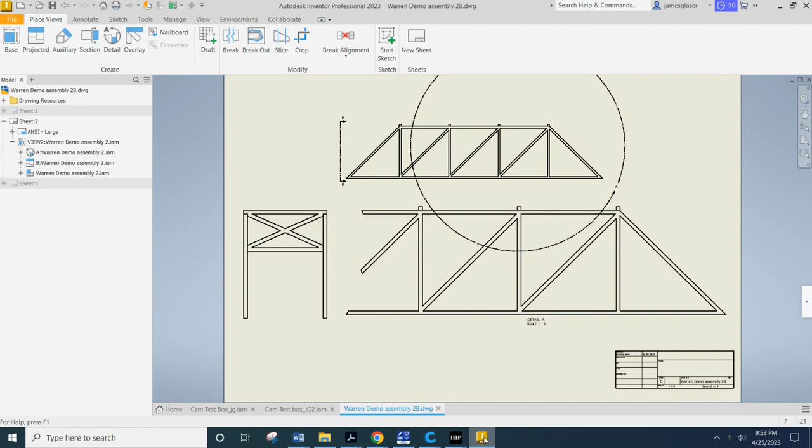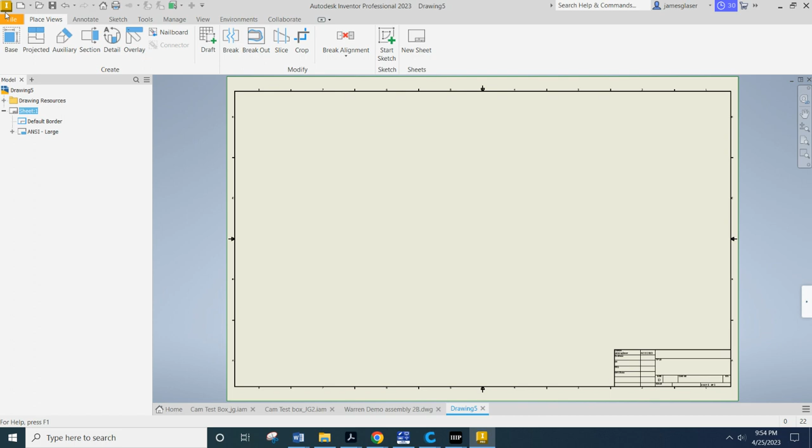I'm going to go ahead and start out with a new drawing. So just new drawing, and it pops up like this. We want to double check to make sure that we are in that ANSI large by looking at edit sheet and seeing that we are a size D with the 22 by 34 inch scope. And now we want to place our first view.

Keeps popping up with that for some reason. I don't get it. Whatever.

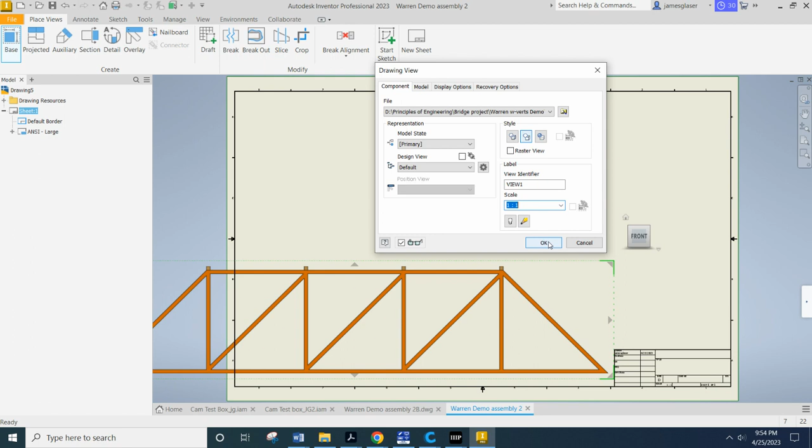Warren 2, that's what I'm playing with right now. As you can see, it popped up really small. Our goal here is to get a 1-to-1 ratio so that way it's much easier for you to make your pieces and also form your whole bridge. So I'm going to go ahead and put that to 1-to-1 and then click OK. And now drag my bridge around.

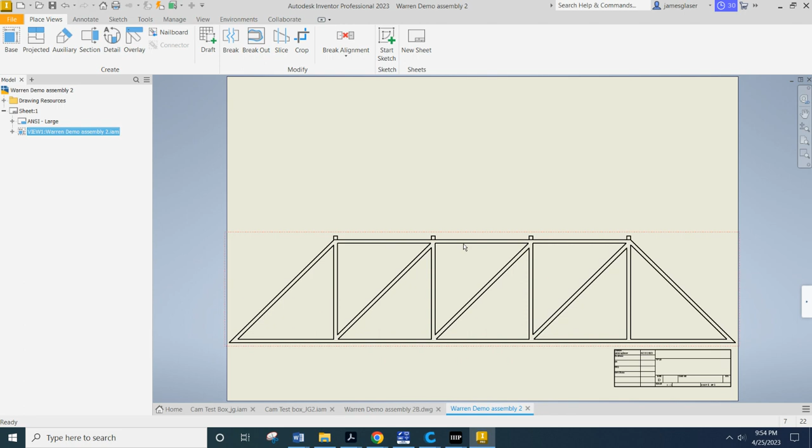Now, what you see here is how it seems a little bit long. So what I'm going to go ahead and do, I'm going to delete the border in order to give me some more space that's clear. But this thing barely fits on there. I'm going to show you a couple of options of how to actually get this to fit on there a little bit better. But before I do that, I'm going to show you, if you're happy with how this is, you can go ahead and just do a projected view and drag it on out here.

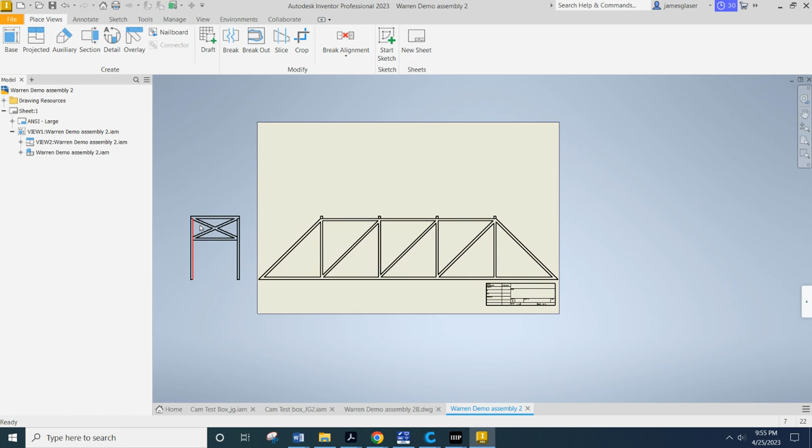I clicked left click one time to set that little green box that you see. Now I'm going to right click and click create. Now you see that this is off the side here. What you need to do in order to drag this up to this empty space is you need to hover over this thing so you see the red box pop up. Right click it and say edit view. Then you're going to come over here to display options and you want to uncheck this align to base.

Normally when you have a projected view, you have it aligned with the base. We don't want that here. So I want to drag this thing up here. And now I've got both of those views that I can use to make my truss pieces on one sheet.

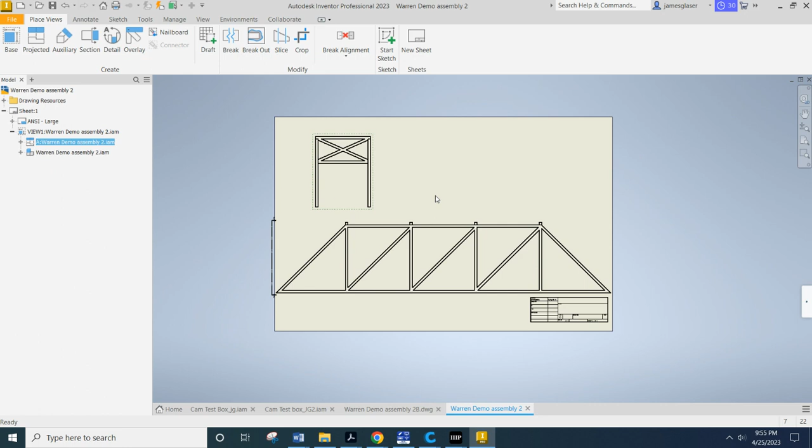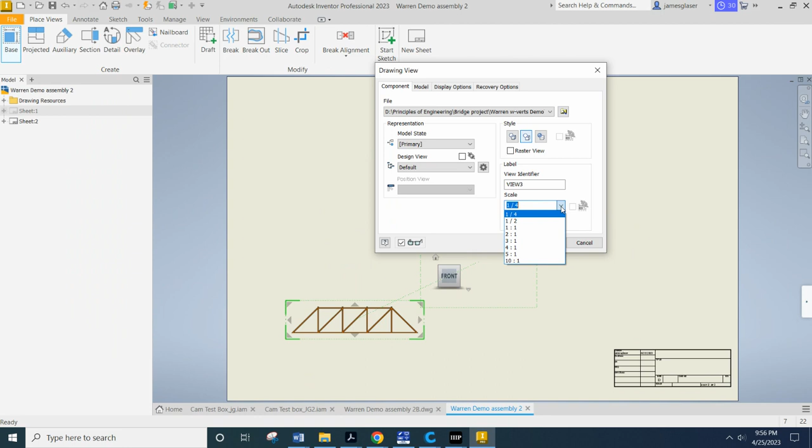But let's say for a minute that you have a truss that is just hanging off both ends. Well, I'm going to show you how to deal with that, or just in general what some more options are. First off, I'm clicking new sheet, and it's going to copy the same properties of the old sheet to the new sheet. I'm going to drop a base view of my truss. Open. And for this case, I'm just going to do a 1-to-4 ratio because I'm going to imagine that it's way too big to drop on here. It's just going to be hanging off the edges. But I still want at least a section of this thing that is going to be 1-to-1.

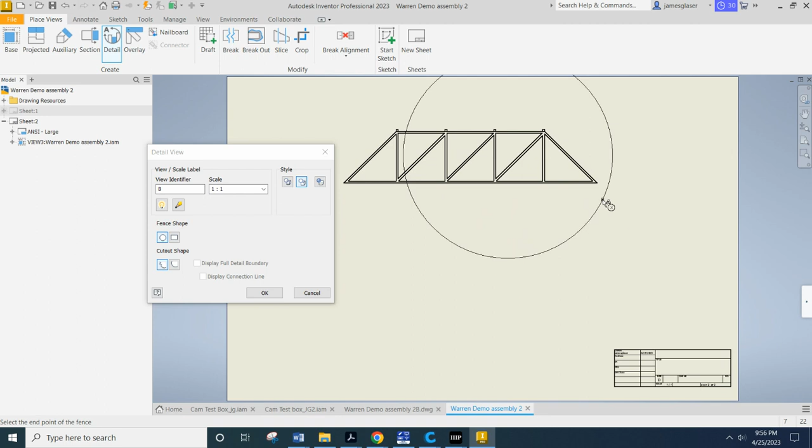So I'm going to click this detail view button. And then I'm going to hover over the section, which would be the center of it. And I'm just going to drag out a circle. Okay. If you're doing this, you want to at least get half of your bridge in that circle, especially if you have a line of symmetry. Most of the bridges are symmetrical about the center. So at least getting that halfway point will put you in business of where you want to be. And I'm going to click right there to drop that.

Now, if I decide I want more or less, I can shrink the circle there, or I can drag the circle on out further if I need more space or whatever. You find your happy medium to display the information you need. Okay. Now, let's say you like this view and you want to put a side view over here. Well, we can come up here to our projected view, click the projected button, tell it what view you want to project a side view of.

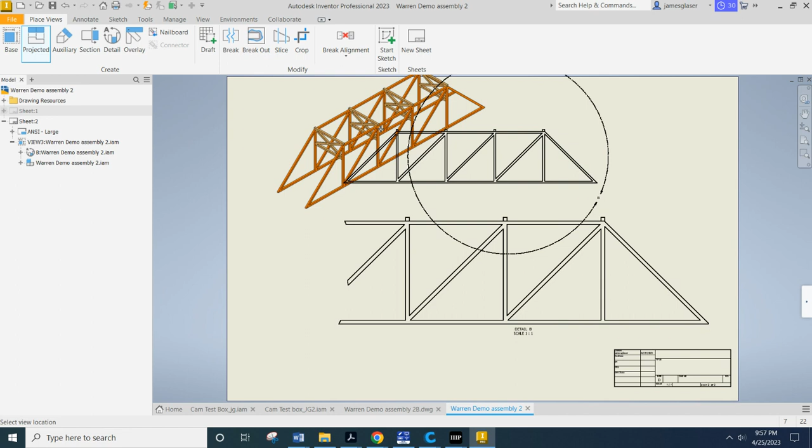You can do an ISO view, that's worthless here, or you can click this side view. Now I'm going to click the side view and I'm going to right click and say create again. Okay, but that gives me this smaller scaled version of it. I want it larger. If I try and make a projected view of this thing, it is not going to work. What is that even? I don't know. Hit escape, drop that.

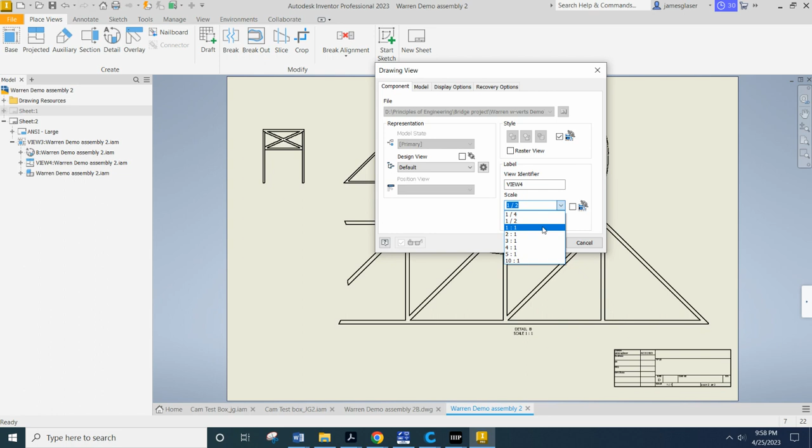What I want to do is I want to make this thing this size. So again, I'm going to hover over it so I get the red box. I'm going to right click and say edit view. Now I'm going to come back to display option and I'm going to go ahead and uncheck align to base again. I'm going to click component, and you see where it says this scale from base? I'm going to uncheck that and I'm going to put that at 1 to 1. Now I'm going to click OK and it blows it up.

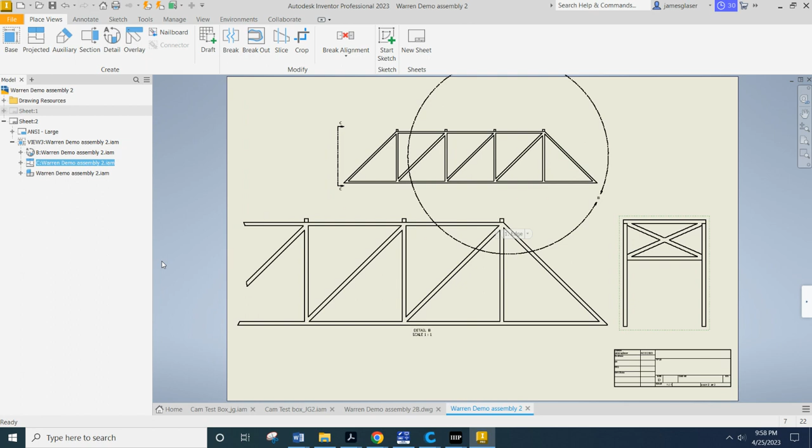And I can just go ahead and leave that there, or I can drag it down here so it makes more sense in my mind that this is an end view of that. Okay. Or what would be more popular or more proper? Aligning it like that. That would make more sense. But whatever. Now, that's a couple of good options for how to get the views you need.

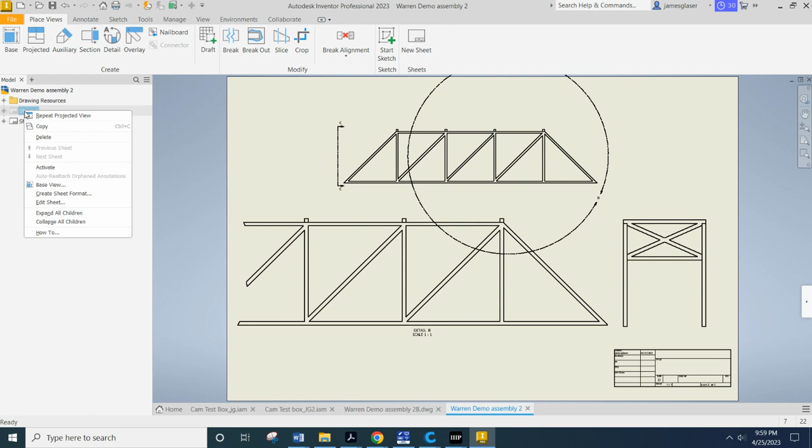If you need more views, like if you need a top view or something like that, you have 2 sheets of paper to work with. I would suggest you use them very creatively. If you decide you need to go back and forth between sheets, you should right click on the sheet that you want to go to and say activate, because you can only work on one sheet at a time.

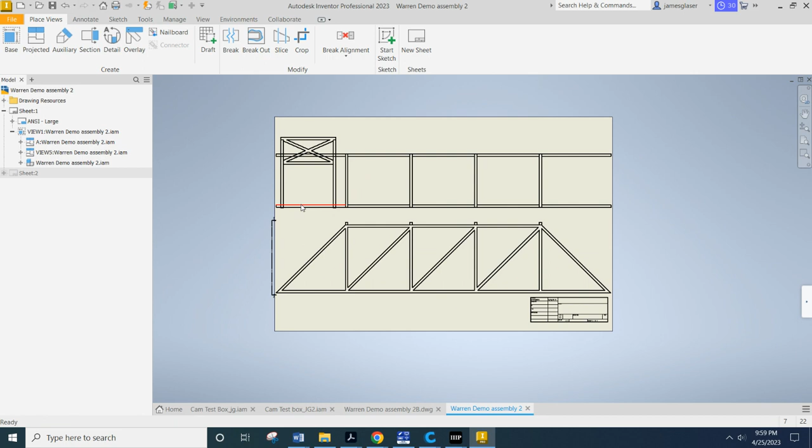Okay, so if I wanted to do a top view of my bridge right here, I could just simply do a projected view of this. Yeah. And that is my top view. Right click it, create. My top view is not that good. Okay, I wouldn't expect that to be too successful. But you guys need to get your views that you need in order to manufacture your bridge down.

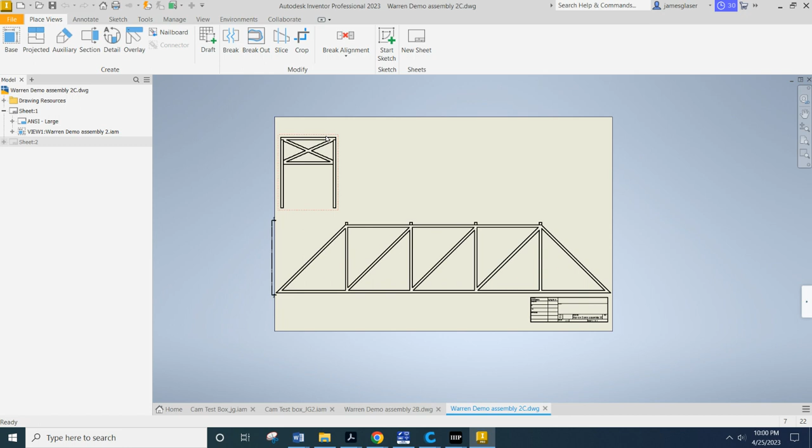Now, when you go to print, what you need to do is you need to go File and first save it. I'm just going to call this Warren. Whatever your base view was first, it's going to pop that into your title. So just make sure that you're putting some notation in there that lets you know what it is. Now, we want to make a PDF of this so that way we can send this out for printing.

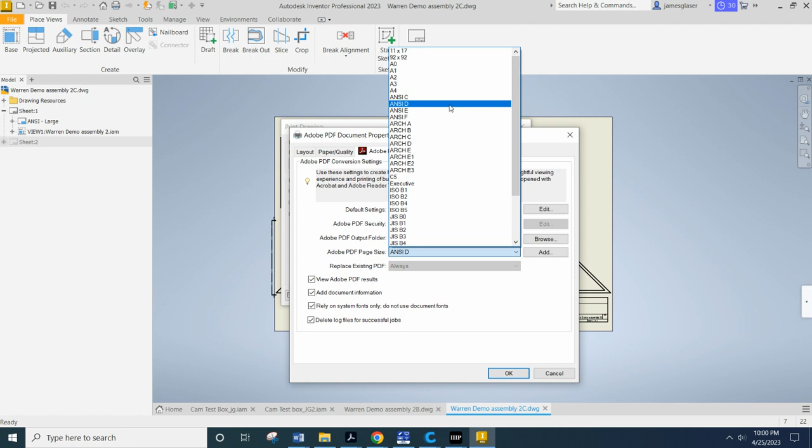So I'm going to go ahead and click print, and now I'm going to select Adobe PDF. I'm also going to select all sheets so it prints out all the sheets that I've got. And then I'm going to select this properties button. And in the properties, most of the time it comes up with ANSI A or it comes up with a standard letter. You want to make sure you are in ANSI D. Click OK. And then we want to go ahead and say OK.

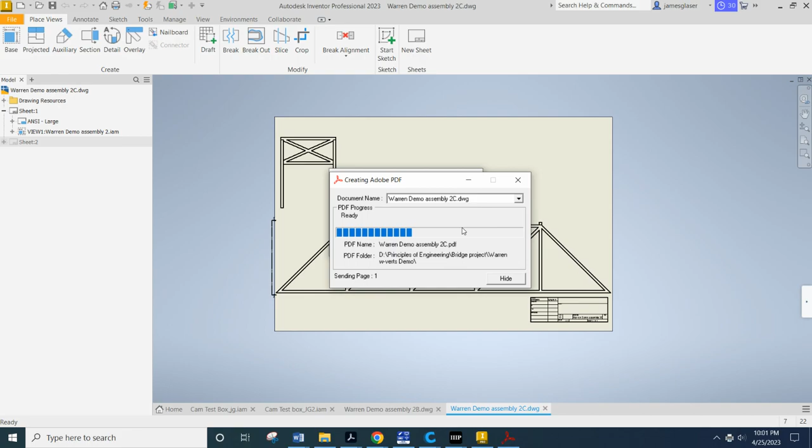It should pop up and ask us where we want to save this thing. It'll pop up with the exact same file name as you gave the drawing. It's just a PDF. So we're going to click save and it's going to put it in the exact same folder. All right, now my Adobe is set up to preview it. So as soon as I saved it and created that PDF, it gave me this preview that it opened.

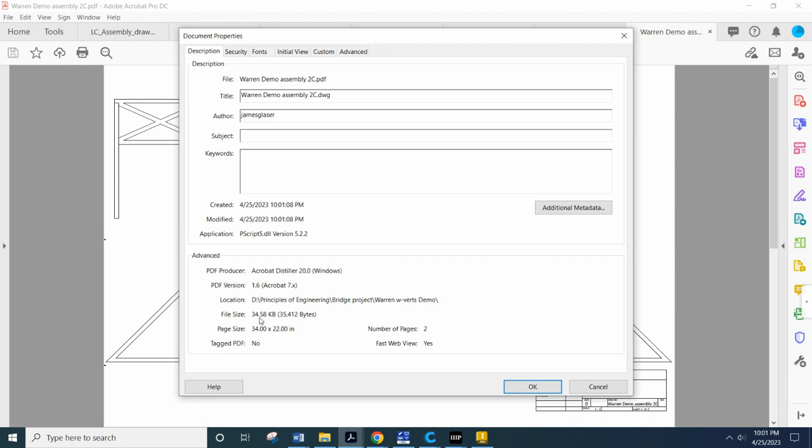You want to open your PDF that you made and you want to right click anywhere in the field and say document properties. And you want to check to make sure that this is a paper size of 34 by 22 before you upload this. Because if it doesn't have that size, it is not going to print out correctly when we go to ship this out to be printed. Okay, so this PDF is what you now need to upload to the Google Drive to be published.

Okay, so hopefully we get those back within a couple of days and you'll be able to use those to their full use. So hopefully this helped.